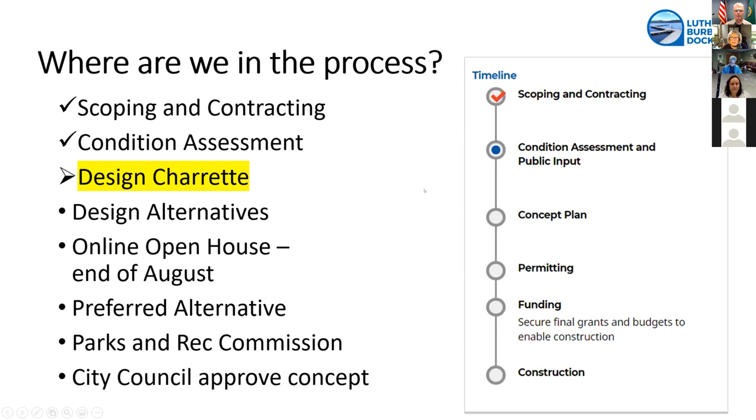Okay, so that's the process we're planning to go through. The goal of this design charrette and this whole process this fall is to develop a concept plan for the waterfront that centers around small boat recreation. So for tonight, we want to understand the technical issues, share ideas from different perspectives, consider the range of opinions that people express, and give the design team constructive feedback.

Tonight we're going to go through 4 focus areas: the floating docks, the breakwater, accessibility, and placemaking. For each of these focus areas, we'll follow 5 steps. The consultant will present issues, and while presenting, we hope participants will type their questions into the chat. Sarah will batch those questions and ask them of the consultant after their presentation. Then we'll open it up to the stakeholders for initial impressions, and if there's anybody who's an individual participant, we'll include them after stakeholders have had a chance to comment. Then we'll do some polling and get reactions to the polling at the end of that process. So we'll go through those 5 steps for all 4 focus areas.

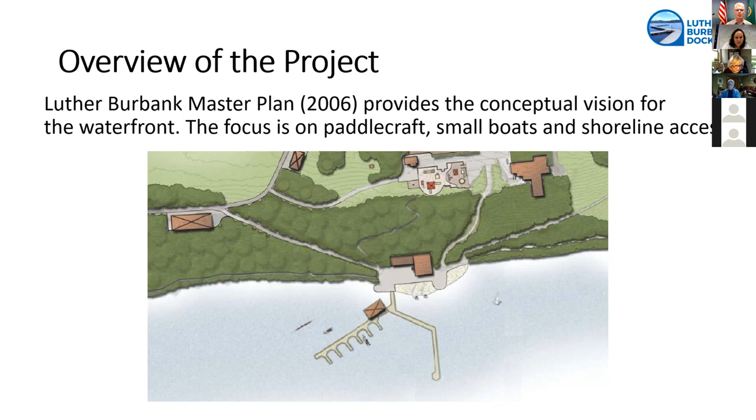And fixed piers would also function for fishing and sunbathing the way they do now. So that's the summary of the master plan.

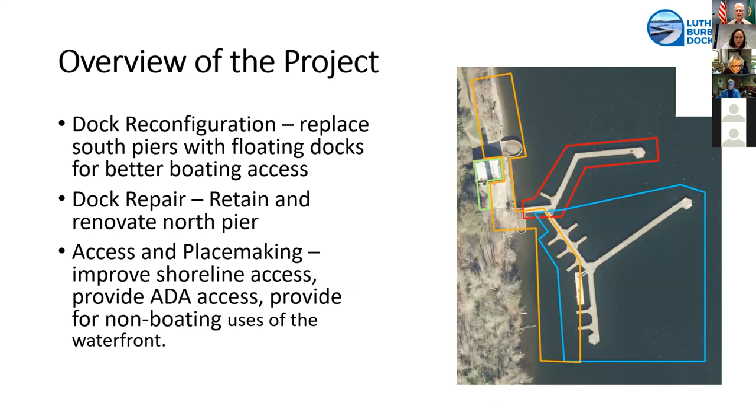Here are the 4 project areas we will be looking at tonight. The outline in blue is the south piers that will be converted to floating docks. The red outline is the north pier that will be renovated and retained as it is. The orange outline is the area of shoreline and access improvements and placemaking improvements, which includes the docks to some degree. The green outline is the boiler building, which is not actually part of this project, but a separate project we're tracking on a separate timeframe. We've done a feasibility study and have a schematic scope of work to renovate that building.

There are a number of project limitations I want to briefly cover. There's the limitation of the physical site, the topography, and aging infrastructure. The 1928 boiler building and the docks, built in 1974, present environmental limitations that are pretty significant. We have a highly regulated environment, and this is on leased aquatic shorelands owned by DNR. We are not the owners, the city is not the owner of this site. This is leased to the city by DNR for public access, so DNR has to have buy-in to everything we do here.

Then there's the financial aspect, which is always a limiting factor on anything like this. Waterfront construction is extremely expensive. Our initial scoping work indicated this project may be upwards of $3 million in cost. Right now the money we have to work with is our Parks Operations Levy, which expires in 2023, and the grant from the Recreation and Conservation Office. I want to give you an idea of other grants available from the state, mostly geared toward boating and waterfront access. The grant limits are typically around $1 million, and getting that million is a lot of work, not a guaranteed thing. At the same time, the city is in a financial crisis, and a big capital project is really not in the cards given the city's budget. So putting together the finance package for this will be a collaborative effort between the city, the state, and other entities.

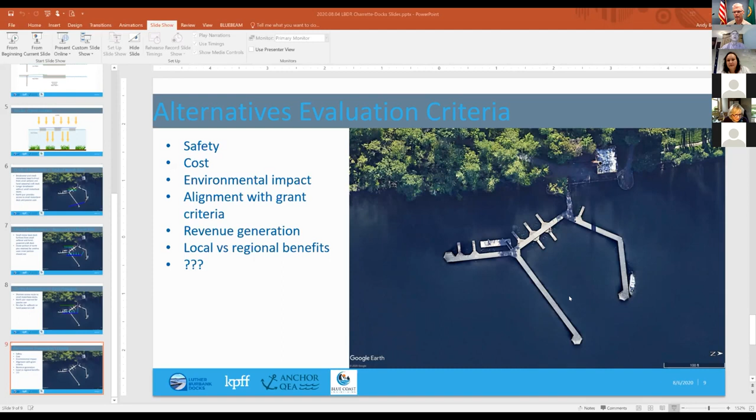Yeah, I can — Andy, we can see your PowerPoint. Can you see, do you see PowerPoint in presenter view, or just the PowerPoint as though I'm editing slides? PowerPoint as if you're editing slides. Oh, there you go. Okay, see your... so let me switch that. Now you should see a slide. Correct. Okay, back to where I was.

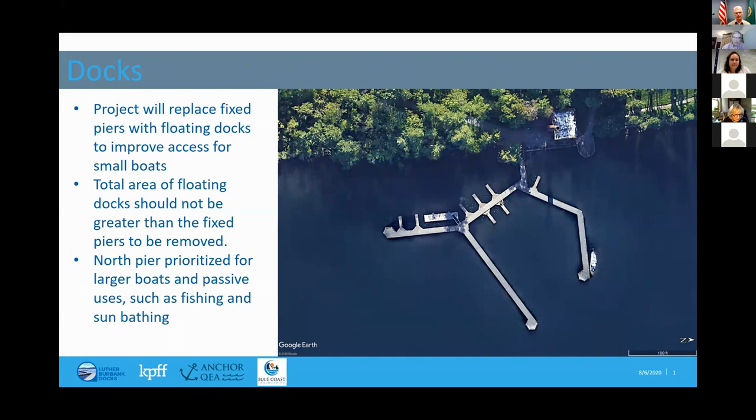So we talked about the overview of the project and the configuration that we have now. I don't know if anybody watched the backgrounder videos we prepared, but the main thing we're doing is replacing the fixed pier with floating docks. Anyone who's visited the fixed piers on Lake Washington when the lake level is low knows they're hard to get in and out of your boat. Whereas with floating docks, it's a constant freeboard, so it's always accessible to whatever freeboard it's designed for.

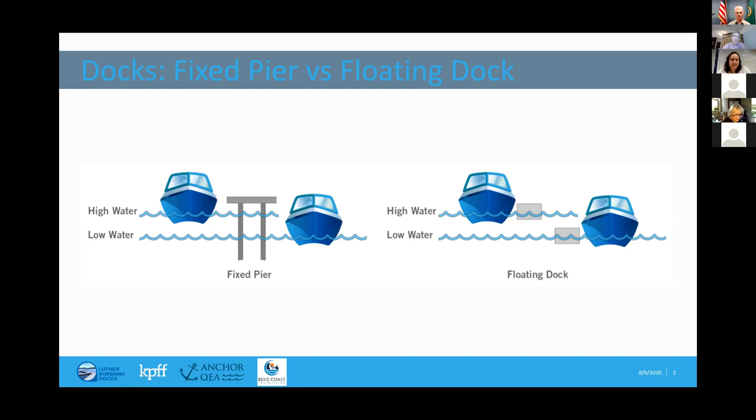That in itself will make an improvement to the facility. Another thing with floating docks is we can vary the freeboard to accommodate different sizes of boats. This is something we'll want to talk to you, the stakeholders, about - what size boats do we really want to accommodate, and what ratios or priorities. But we can design the floats to best suit specific types of vessels.

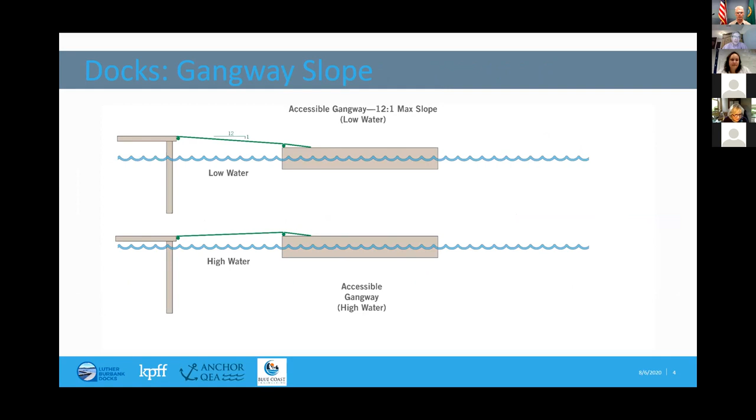One thing on the accessibility front, there is a requirement that the gangway have a maximum slope of 12:1. So at low water, we'll make sure the gangways are long enough that we don't exceed that slope, and therefore we keep all the new floats accessible. At high water, it becomes a moot point, or we may even have a gangway that slopes upward slightly. But regardless, we can't exceed that 12:1 slope.

We'll also use open grating as much as we can to let sunlight through, which improves the habitat on the seafloor in the area of the docks. So with that, I'll just go through some alternatives that we could consider for the new floats.

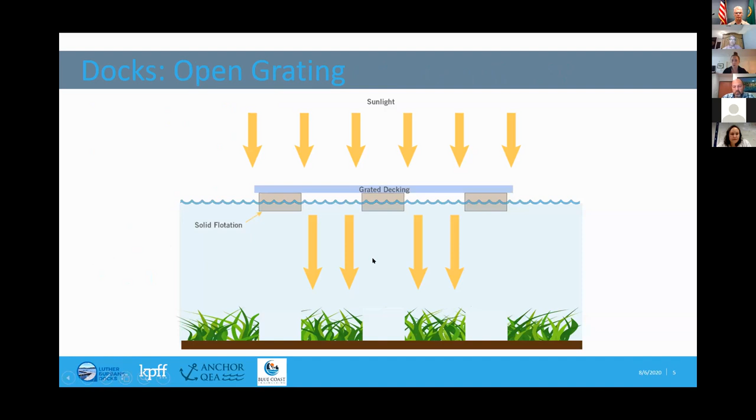And this definitely brings the two types of vessels closer together. Great.

We've got another question related to water depths. What are the water depths at the inner dock and outside breakwater?

We did have a bathymetric survey done, and I got some preliminary data from that, but I can't remember. Bob, do you remember how deep it is from the survey work offshore? You know, Andy, unfortunately I don't remember. I think it's 30 to 40 feet out at the offshore end. And then in this area where the small craft float would likely be, I think it's still on the order of 8 to 10 feet. So it drops off pretty quick.

I believe it's fairly steep, the mud line drops off pretty quick in there.

Not seeing any more questions, although we have an agreement thinking about separating the motorcraft and the smaller boats from launching. But no other questions in the chat right now.

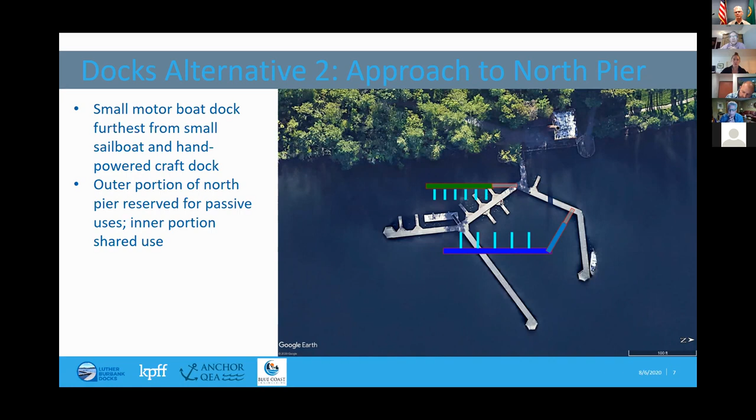Don Cohen has his hand up. Yeah, I'm not being successful getting my written thing, so I'm raising my hand. I'm concerned about how these different configurations impact fishing, because I'm talking about fishing with your grandkids, kids, and so forth, and it's going to be decreased by at least half here.

And the breakwater concept provides even more limitations, like it does at Groveland, where you can't fish anymore. I think if we end up with a configuration like this, or if we provide access to the new floats from that first hexagon, I don't think that would impact fishing from this north pier. And like I said, that's part of the feedback we want, is how important is that preservation of fishing access. The different options definitely put more and less traffic out on the fishing pier. But we can protect the fishing, at least from the northern pier, with a configuration that looks like the one you can see now.

Hey Don, could you elaborate on what you mean by the breakwater cutting off access for fishing? Well, I'm not sure how the breakwater would work here, but if you go to Groveland, where you used to be able to cast out anywhere west, you can't do that anymore because of whatever that structure is there that I assume is a breakwater kind of structure. And I'd be interested in somebody like CJ on the park staff.

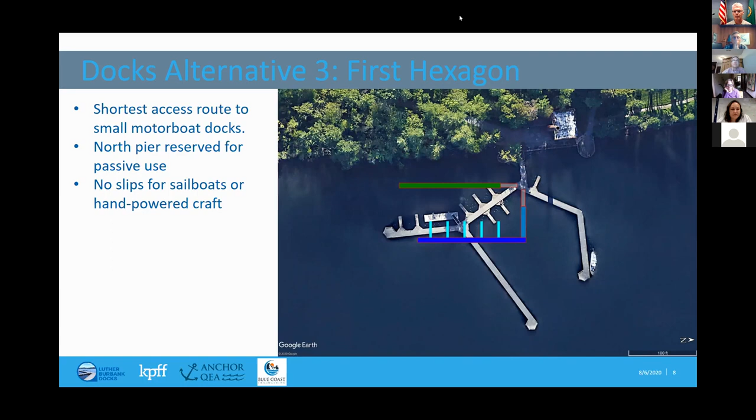All right, so we're a little ahead of schedule here, which is good. I'm going to go ahead and ask Kathy Ketteridge to talk about breakwaters.

Oh, and you're muted, Kathy. The curse of Zoom, I know. Can everybody hear me now? Does that work? Great, okay. I'm going to share my screen here. Hold on. Then just going to ask for, can you see the screen, Paul?

Yes. Okay, so I'm going to talk about some design considerations for the floating breakwater component of the project specifically. I've made a few notes based on questions people asked. I'll try to answer them as I go through. And obviously, if there's other questions after I'm done, I'm happy to answer those as well.

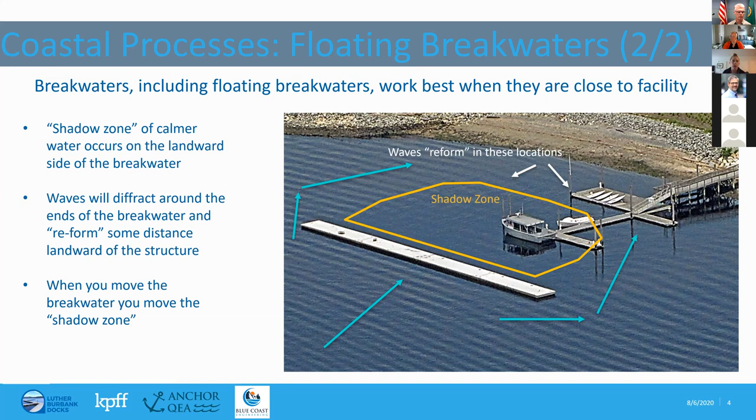We've got another question. Will the breakwater incorporate grating? And if so, how much? Yeah, that's a good question.

I have seen floating breakwaters that use grating. I don't know from a structural perspective how difficult it is to incorporate that into one that's also used as a dock. I've usually seen those used when it didn't need to be used as a dock. But Andy, I think perhaps I might defer that to you if you have more information on that one.

We may be able to use grating for the dock because we've used open grating for other docks, so the use doesn't preclude it. The challenge is that the breakwater, in order to absorb the wave energy, needs to be a fairly solid structure. So if you have grating on top of a solid structure, the light doesn't get through the solid structure, even though it does get through the grating, and so you lose the benefit of the grating. In cases like that, it may be easier not to have the grating and just make the structure itself the walking surface. So if there's an opportunity, if it's open beneath the grating, we may be able to do that. But it depends on how much energy we're trying to manage in other aspects of the design. It's an option, it just doesn't work very well if the breakwater itself is solid.

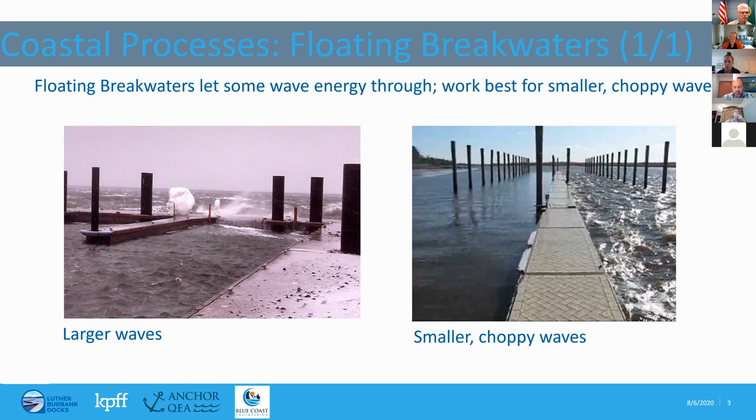We've got another question in the chat. Is there a significant seasonal difference in the wind patterns and velocity? Wondering which season's data we're using. They're assuming higher winds in the winter, but increased boat usage in the summer, creating wakes and waves. And then also thinking about this in terms of coastal erosion.

Yeah, so the wind data here is over 20 years combined together, and there is definitely seasonal patterns, so stronger winds certainly occur in the winter and not in the summer. We are anticipating that storm waves would be occurring mostly in the winter. From a coastal engineering perspective, I think of that as survivability of those structures that are there, because storm waves might be a little smaller than the wake heights, but storms last for a very long time, so you're going to have waves of a certain height for days perhaps at a time, or hours at a time.

For summer, we're anticipating that boat wakes will be the dominant wave condition that the breakwater would have to deal with, and so wind storms would not be such a concern in the summer.

In terms of coastal erosion, we'd look at both conditions. I've seen sites where, depending on wind conditions versus wake conditions, both can be equally erosive. Storms tend to be more erosive than boat wakes, just because they last longer, and duration of storm has a direct impact on how much coastal erosion occurs. So we'll be looking at both, and there is a seasonal pattern of winds we'll be considering.

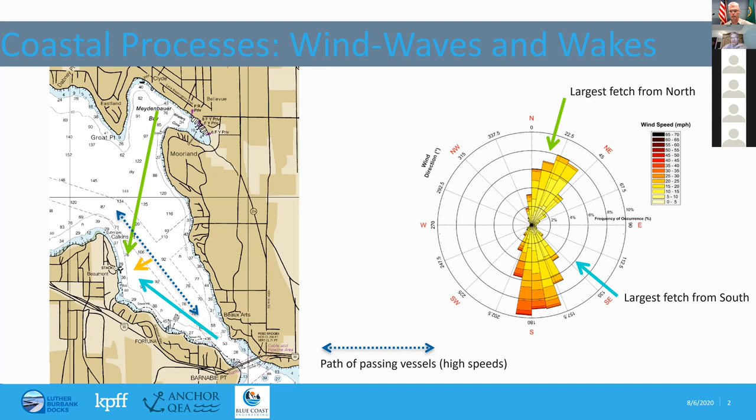I liked the separation between the breakwater and the small boat docks. I liked the continuation of the breakwater sort of coming back around to that southeast aspect. And I liked that the finger docks for small boats were on the inland side of it, creating space between the large boats and smaller boats. Great, thank you.

Okay, other comments? This is a time when you can just speak up at this point, I think, if you have a comment. Okay, I'm not hearing any.

There's another - looks like we've got a couple other questions. Will the new dock design alter the placement of the no wake buoys, and what determines where those are placed?

I can answer that. The no wake buoys are placed by Mercer Island Marine Patrol. They are the outer limit of our aquatic lease with DNR. And what's the second question? What's the last part of that question?

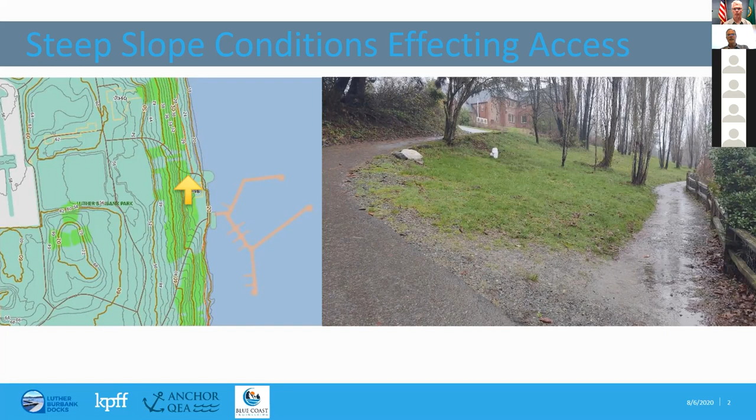On the other hand, we have a compacted gravel route along the north shoreline that appears to be, the grades at least, ADA accessible. So we have kind of a combination of conditions there, and that is one of the constraints.

This is showing all the opportunities and constraints regarding access. One constraint is the slope and the access from the main entrance. Another is the distance from this part of the site to the parking - if someone were to bring their own boat, that's a considerable distance. And then others are just the access to this beach to the north, which right now, because of the slope right along the shoreline - these orange lines indicate the steep slopes - is not currently ADA accessible.

There's also a number of opportunities, and I'll show you one for connecting this main entrance to the park to our site and making that ADA accessible. Another opportunity is to connect all along the shoreline of the park and make that all ADA accessible, including our site. Other opportunities are to make these new docks ADA accessible both to the land and to the water. There are some really important opportunities for access as part of this project and other future projects.

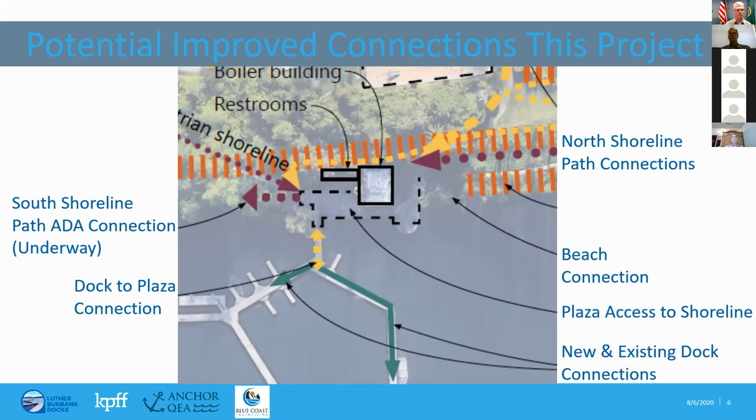I'm going to go to a different view here. This shows in this area how we have a slope behind the beach, between the current crushed surface Paul was just talking about, and the beach here, with the plaza raised up above. So what I'm envisioning is a new route extending from just west of the plaza, at an ADA compliant slope, down to this beach.

Maybe you could repeat the rest of the question. So the full question: is it possible to provide ADA access to the beach and still maintain the shoreline protection features? I would say yes, it is.

I think that refers to the log shoring, and I'm not sure what else there's several things there, but I imagine the log shoring is one of them. Yeah, I think those logs, some of them may need to be repositioned. The main thing keeping this beach here is the gravel material itself that was placed there.

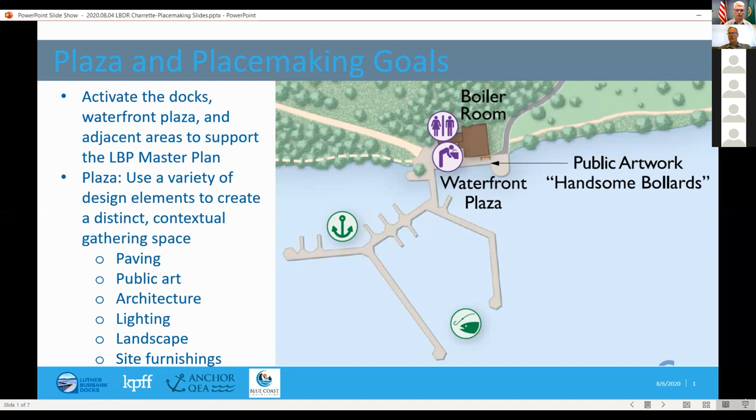As Paul said at the beginning, the Luther Burbank Master Plan, which I worked on as part of that team years ago in 2006, identified this area for the uses we're talking about.

This discussion is more focused on the plaza as a kind of gathering space that has boating uses and other park uses that anybody can take advantage of. I'm listing here six elements, and we'll have some polling at the end that has a few more that are part of how you create that gathering space.

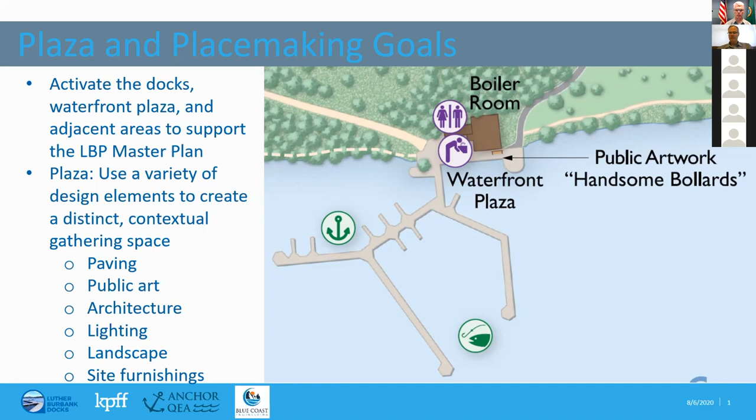Because the word placemaking, landscape architects love this word, and they love creating a quote unquote sense of place. So we put in a couple of definitions that I think are helpful, and I'll read these. The first one is from Wikipedia, and it says, placemaking capitalizes on a local community's assets, inspiration, and potential with

the intention of creating public spaces that promote people's health, happiness, and well-being. And the second one from the Project for Public Spaces says, placemaking inspires people to collectively reimagine and reinvent public spaces and social identities that define a place and support its ongoing evolution.

I think one thing that's really striking about both of these in light of tonight's meeting is that they do focus on the community and the context of where a site is and what's important to the people who will be using it as an expression of how you make it a unique place and create a sense of place that's appropriate.

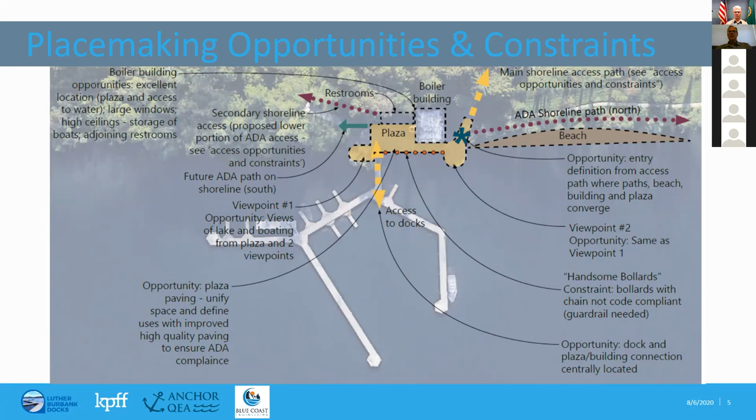Another opportunity on both the north and south side is to create more of a sense of an entry point, so as you come into this space you feel you're entering a special part of the park. And the docks themselves, as they're being rebuilt and reconfigured, offer other opportunities for public art or railings designed to provide a sense of placemaking.

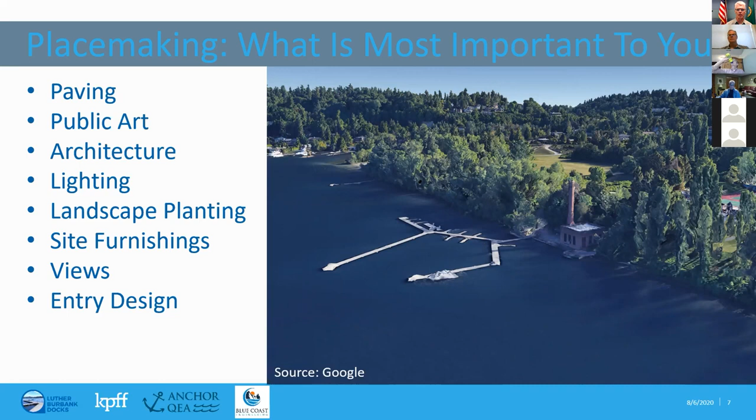Right now, we're going to talk about criteria for evaluating all these different options here. And that's Andy. He's got a slide or two on that.